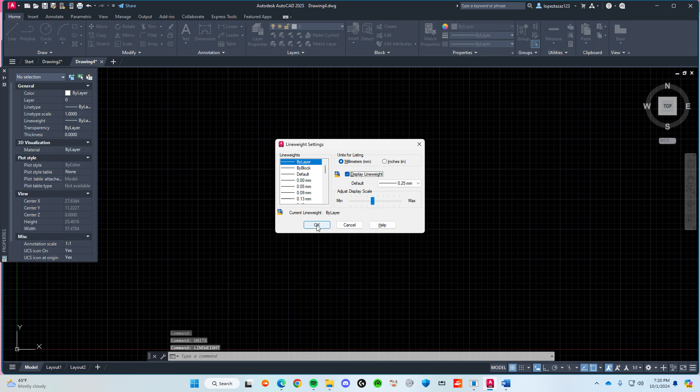So for mine, the width is 10.25, which is 10 and 8/32, and my height is 18 and 8/32. So 18.25 is my height. And once I'm done with that one, we can make the holes for our white panel.

Forgot to do this, but you have to make sure that it is on diameter. So I just forgot how to change that. So it should be on diameter when you're doing this. I don't want to end the video there.

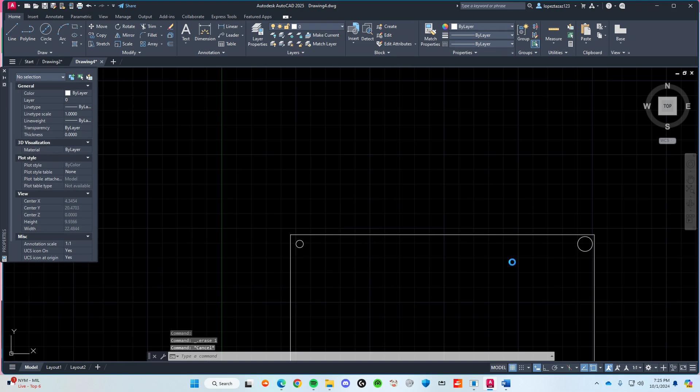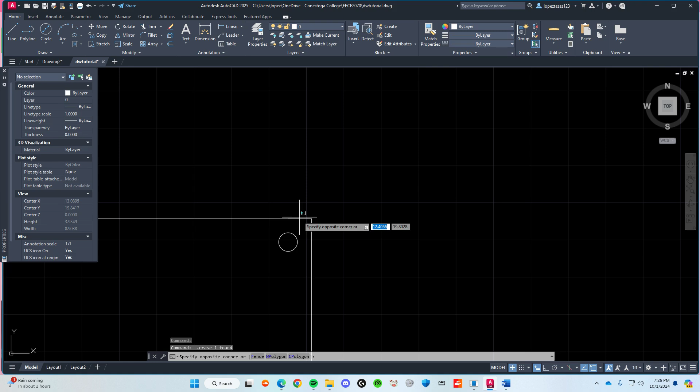Just make it, so yeah, make sure your circles are set to diameter. I have to redo this, so don't forget to save very often.

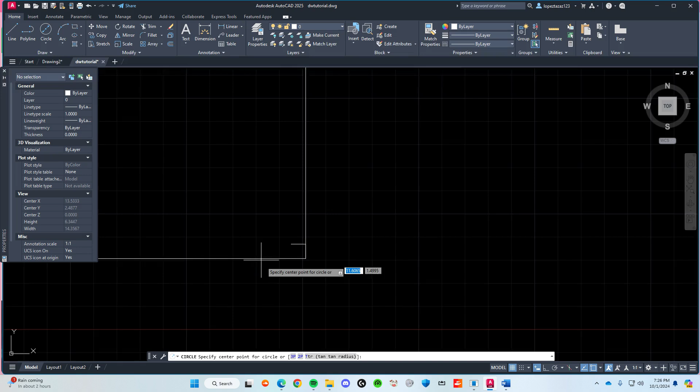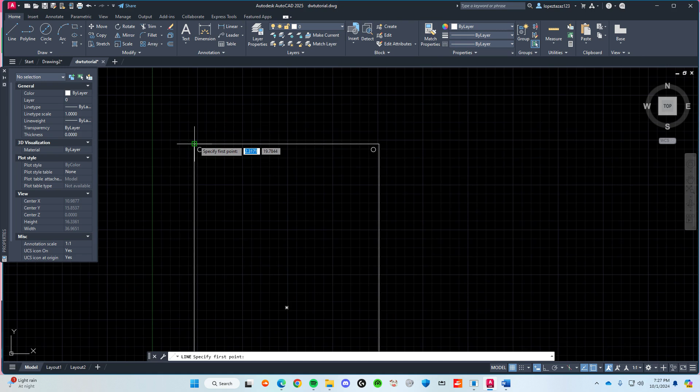Alright, once we're done with the holes there, we focus on the other holes. The 6 holes here in our white panel. So from here I went from 4 inches.

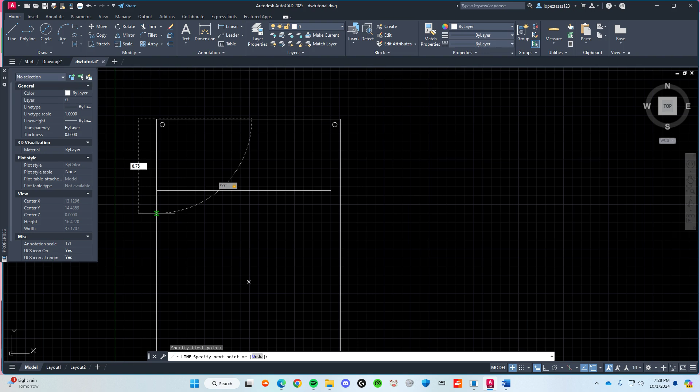0.125. So that's 8 24/32. I have to, 24/32. 0.75, so 8.75.

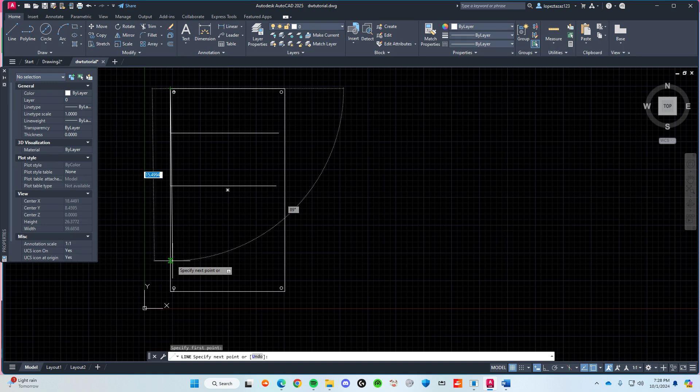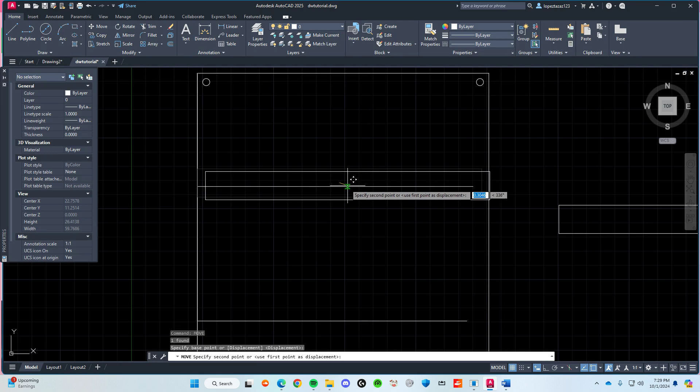So for my sketch I didn't really finish all the measuring part, so I kind of missed some of them. So what I'm gonna do is just make the bars. So mine was 10 and 1. Why is it not? Okay.

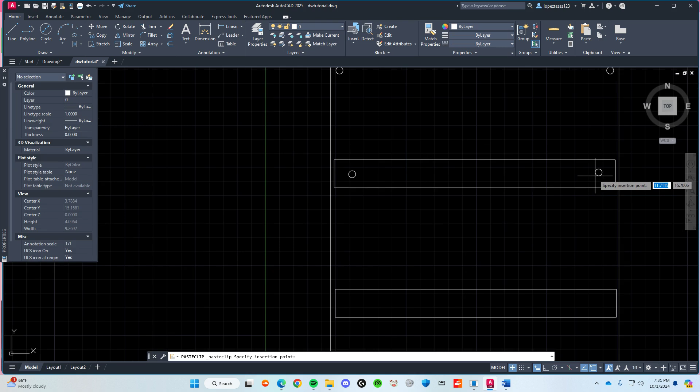Okay. Making sure it's diameter, 0.25. That's my hole. Okay.

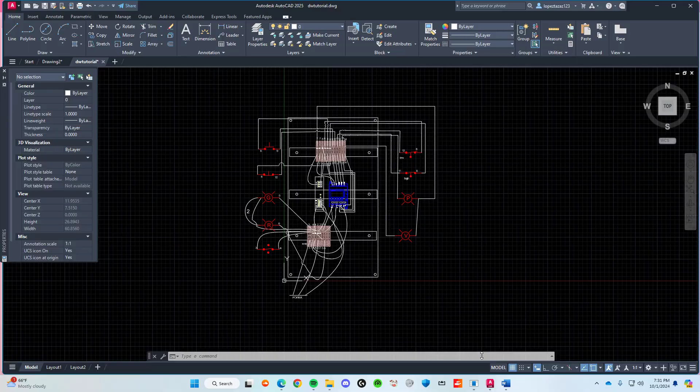Okay, once we're done with that, what's our next step? The components. So we'll be placing components now. So first thing, we gotta open. Oh yeah, we would want to open the DXF files.

So we need the terminal block. We'll be opening that. Change the file type to DXF. If it's not DXF, the terminal block is different. Okay, so terminal block, open a new drawing and type import. Import terminal block STP.

Just wanna wait for this. So yeah, it takes a while, but okay, so done. Here's our terminal block and Control C. So I'm pretty sure I have one.

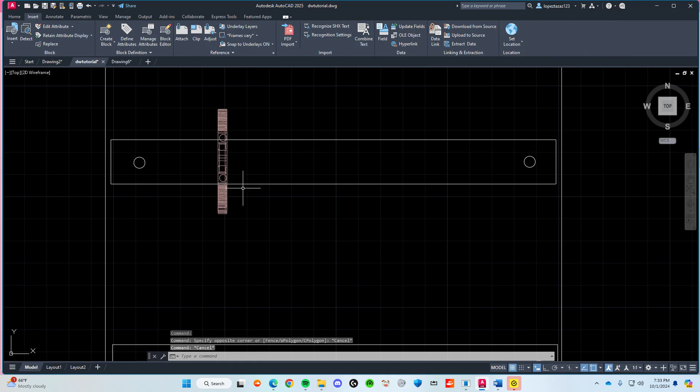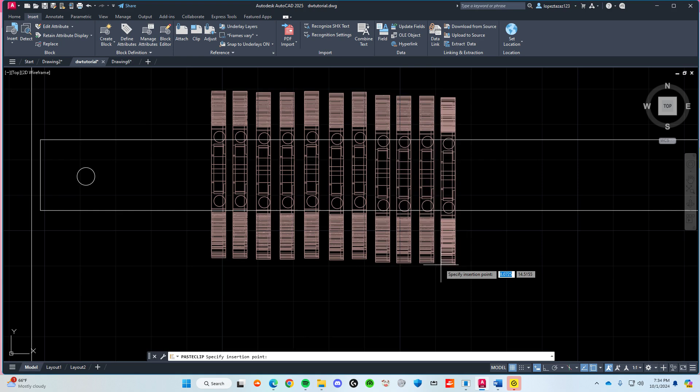One, two. I like to make a space for all of them. So 3, 4, 5, 6, 7, 8, 9, 10, 11, and 12, leaving us with 8 terminal blocks on the bottom.

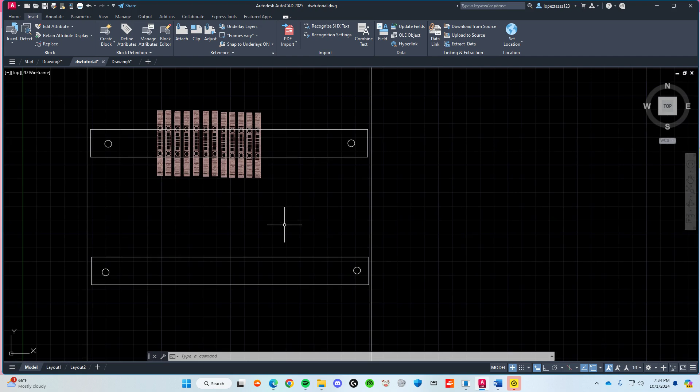So yeah, so that's the STP file. Now we'll grab the other, the fuse. We'll grab the fuse.

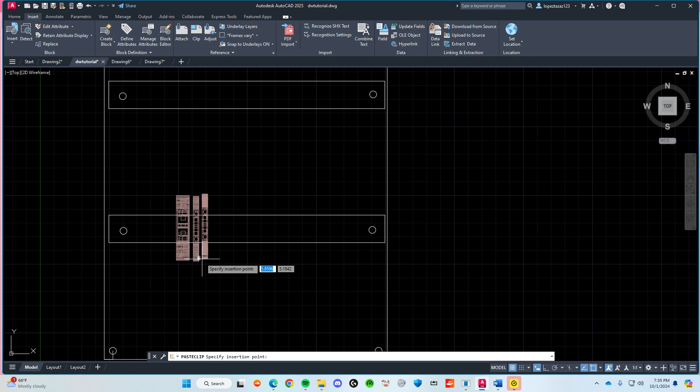So here you go. Fuse is there. Place it on the third one. One, 2, 3, 4, 5, 6, 7, 8. Yep, 8. 8 on the bottom.

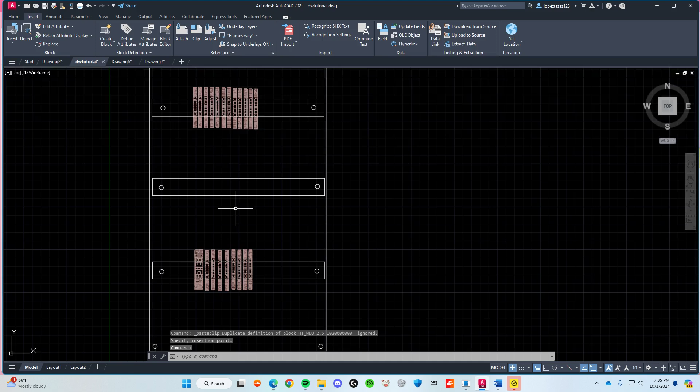Now once you're done with that, we need to select similar. Let's create a new layer first. So this would be our components. Pretty sure, yep, it's the components. And we would want to make that color into blue. There you go.

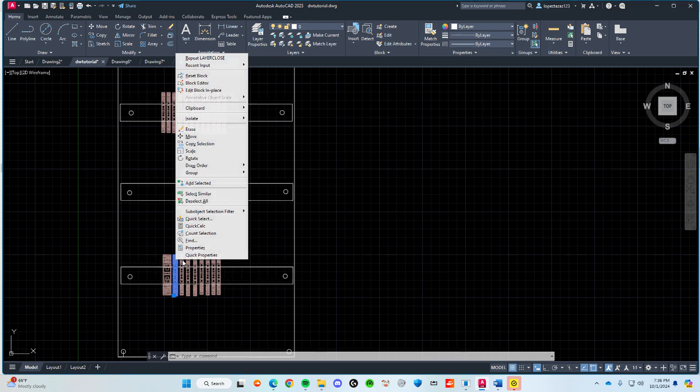Select that. Select Control 1 to bring up the properties. Go to components. Now it's blue. All of them are blue now. Now we make this fuse also blue, because that's our component. And the remaining one is the power supply and the relay.

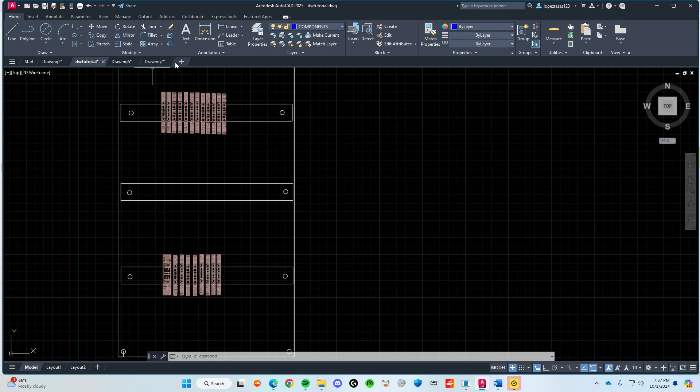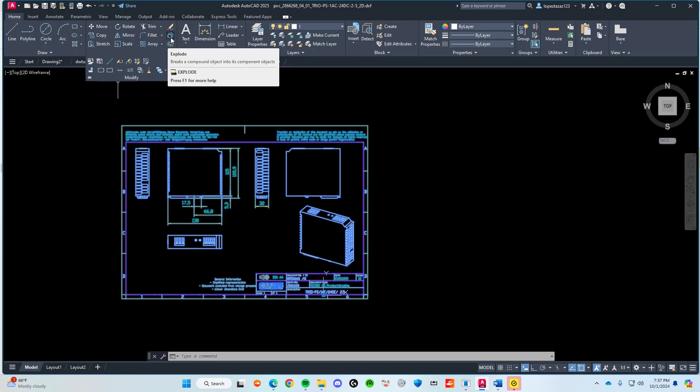Power supply, so DXF file, the front. And as you can see, this is the file, and we would want to break this apart. So yeah, click explode, and we'll just grab this. You'd want to scale it down a bit. Rotate it.

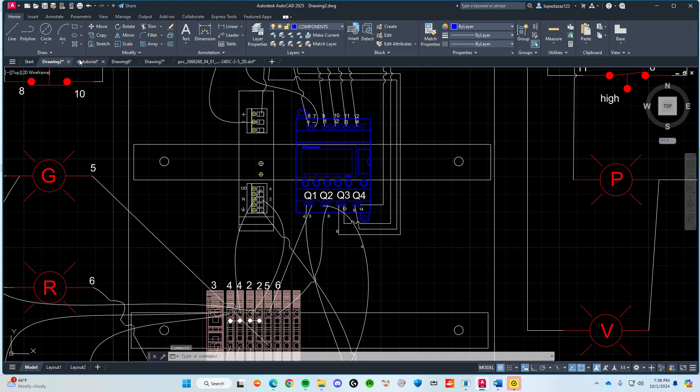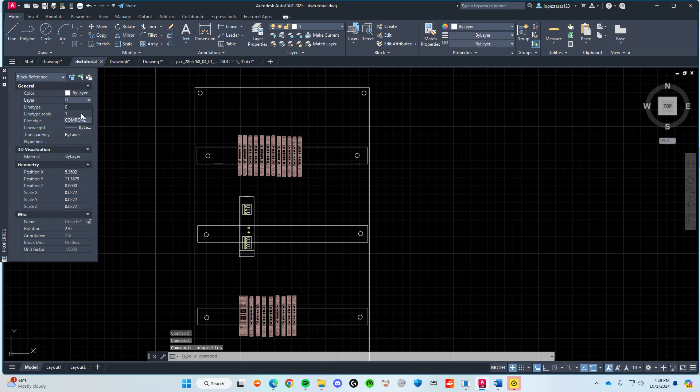Yep, rotate it. Let's see. Yep, that's right. Might want to scale it a bit. Done with that. Make sure it's on component. And last is our relay. Open that.

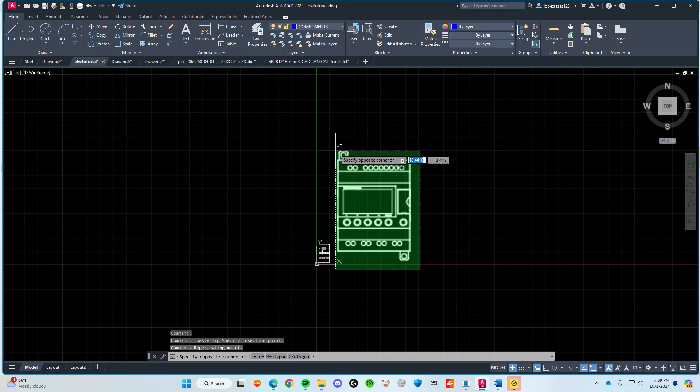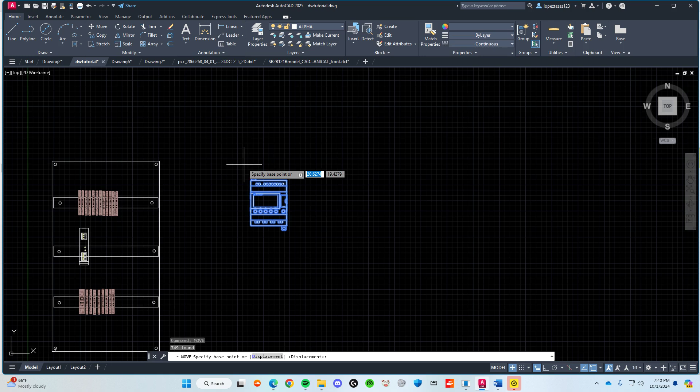So yeah, this is the relay, and we will want to turn off the dimension. Just copy this first. And scale it down. Let's just see. I say that's pretty big. Scale it a bit down.

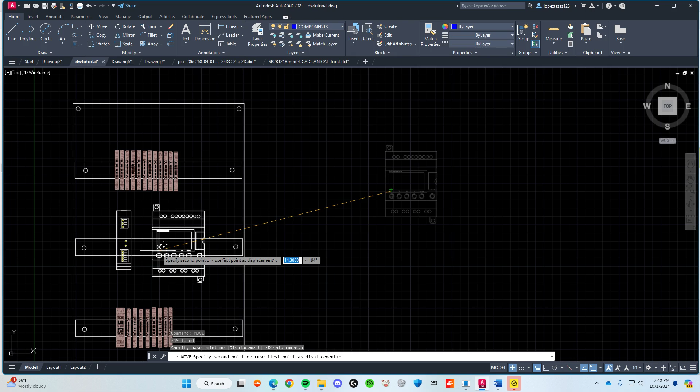Yeah, before that we need to make this as a block, and this is the relay. Now it's good to go. And it's on components, so we're good.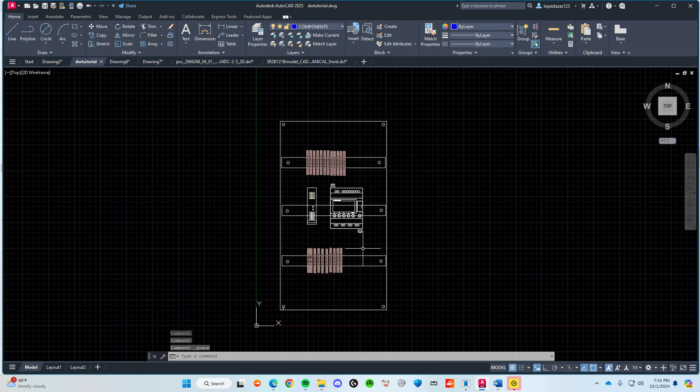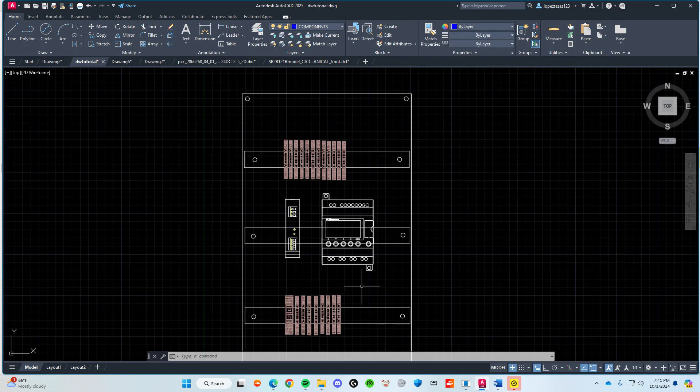So once that's done, we can move on to our dimensions. So let's turn this off real quick.

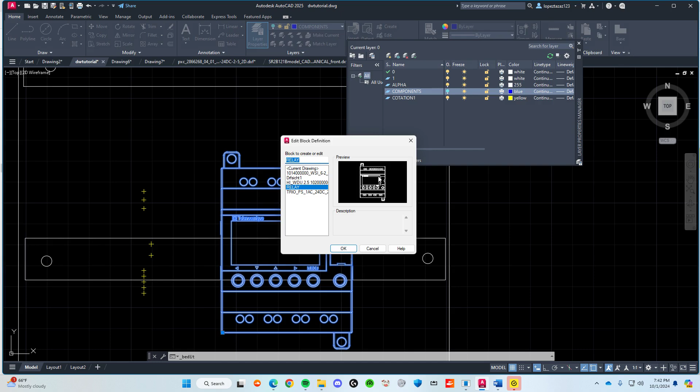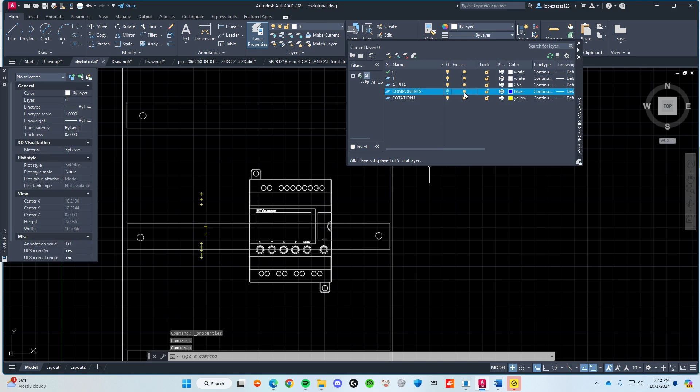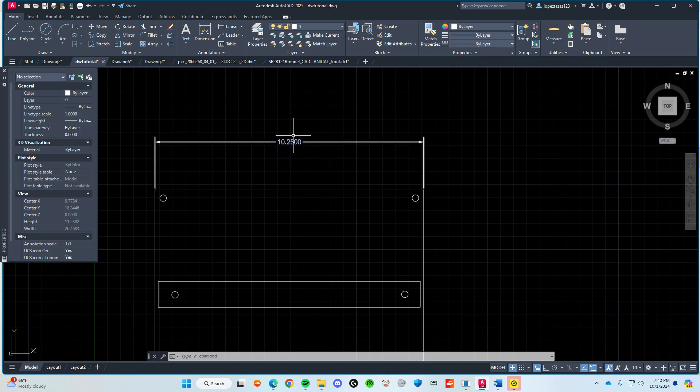So I'm not sure what's going on with this. It is the components, so yeah, just freeze them. That's all we want to do. Freeze, and we'll do the dimensioning for this one. So we know the width is 10.25. Let's just reduce this to 10.25 instead of 10.2500.

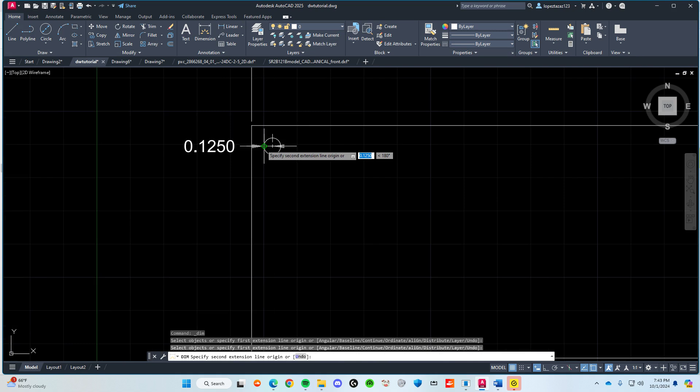And this one is up to your choice. You can do whatever for the text height. Just want to make sure that it's readable. So I went from here. It's 10.2. 0.125.

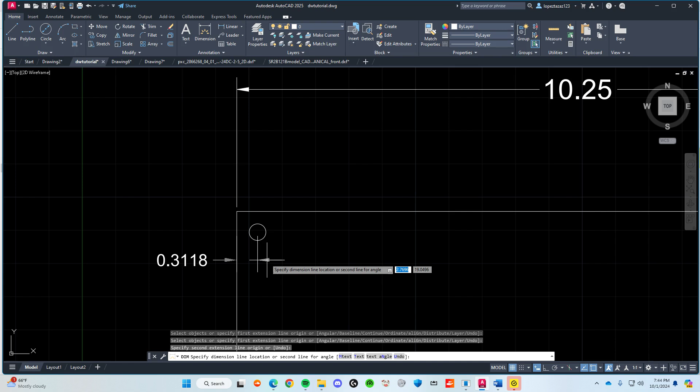Nope. From here to here. I said 0.3125 was my thing. So I did that. The new layer is our dimensions plus the wiring and other components.

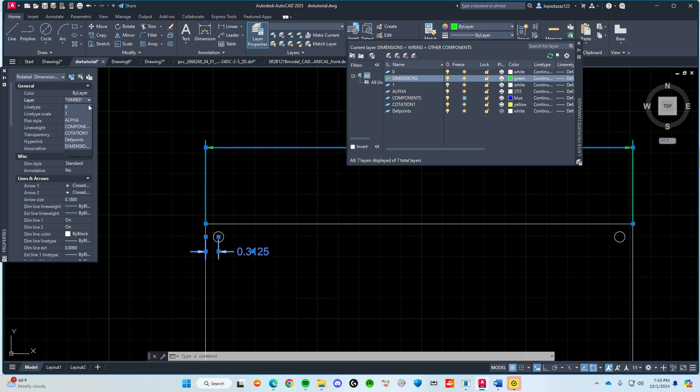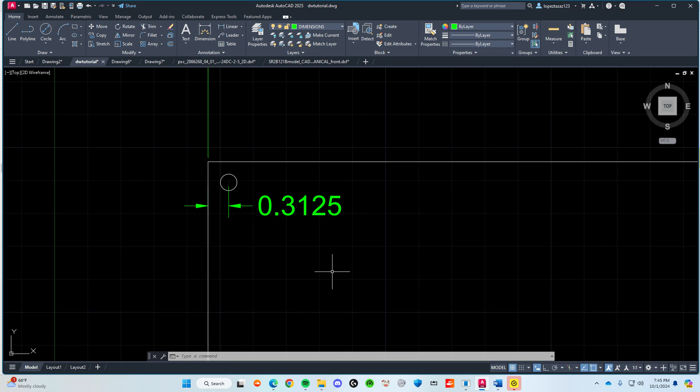Oh wait, no, my bad. So it's just the dimensions. We make this green. My bad, guys. So I got the dimension and the components, so now we're left with the wiring stuff. So yeah, we all have different sketches for our dimensions, but I'm just doing the one from my sketch.

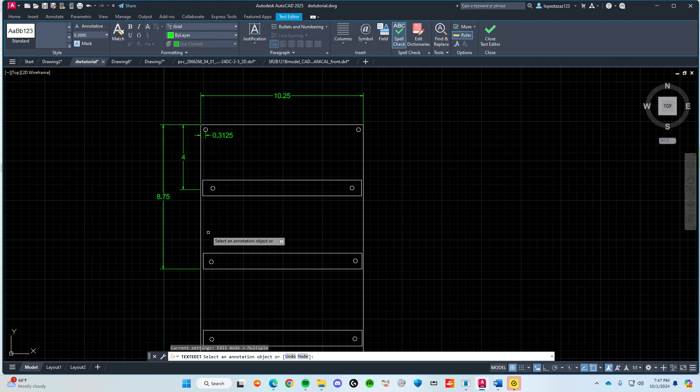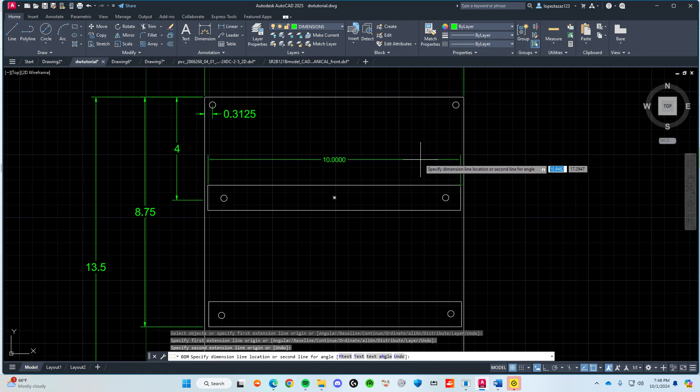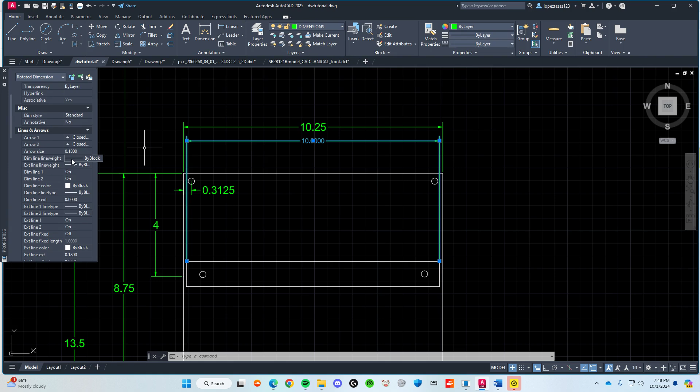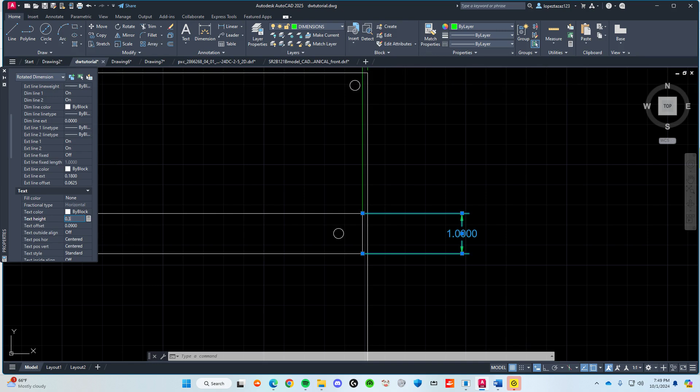So I'm on my last one, and this one is 13.5. So yeah. So yeah.

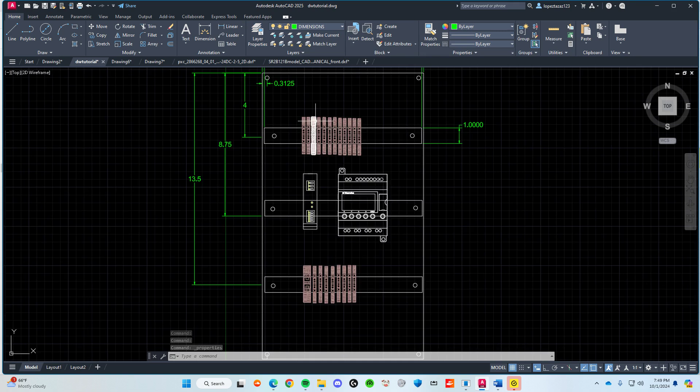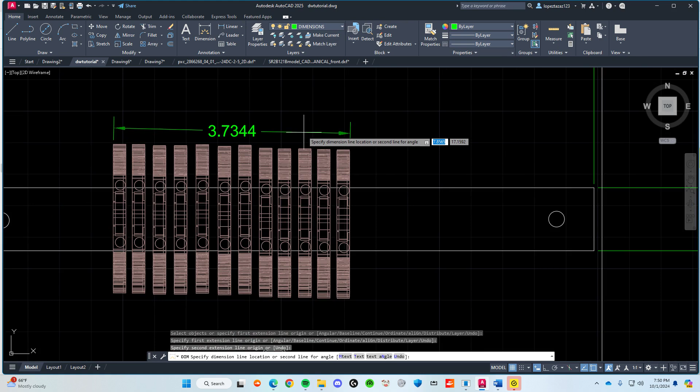We might want to unfreeze the components here, so we can do the dimensions for our terminal blocks. So from here to here. Mine was 2, and each one of these is

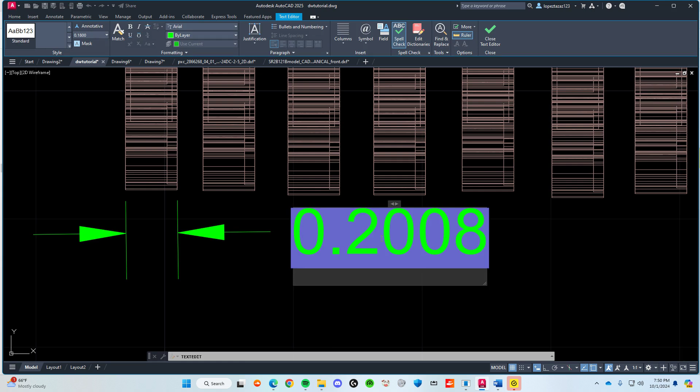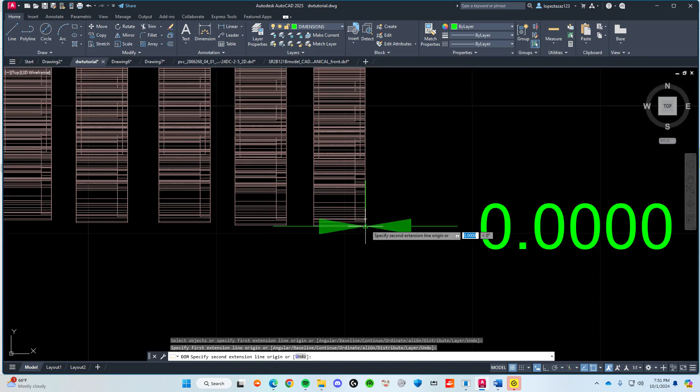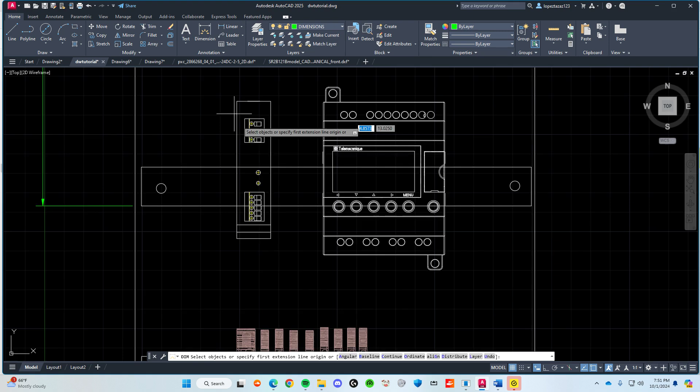8/32. Then the inch was 1. At least that's what I got for my sketch. I move on with this one. The power supply, the width is 1. Width was 1.25.

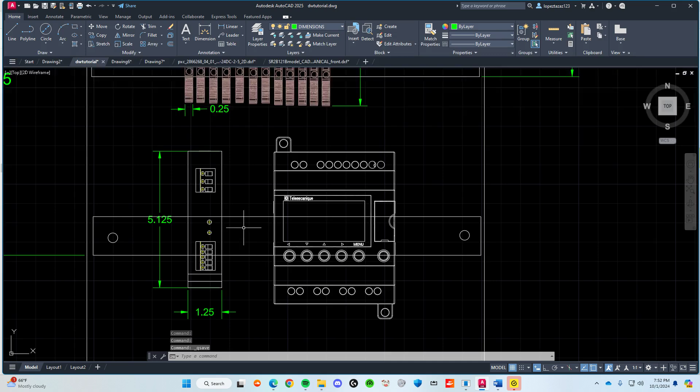And I got 5 and 4/32. So I got 5 inches and 1/8 for mine. Yep, now we move on to our relay.

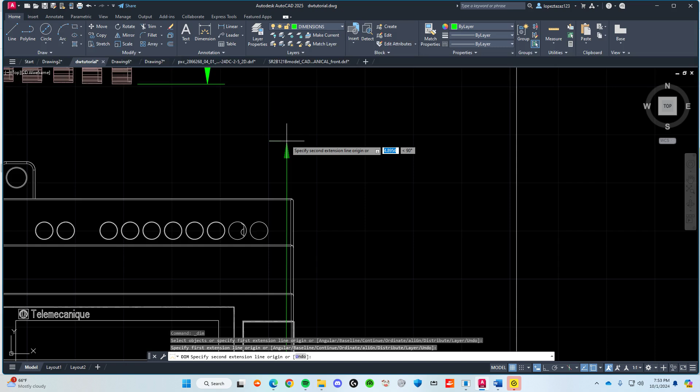So the height for mine was 3 inches and 16/32. Yep.

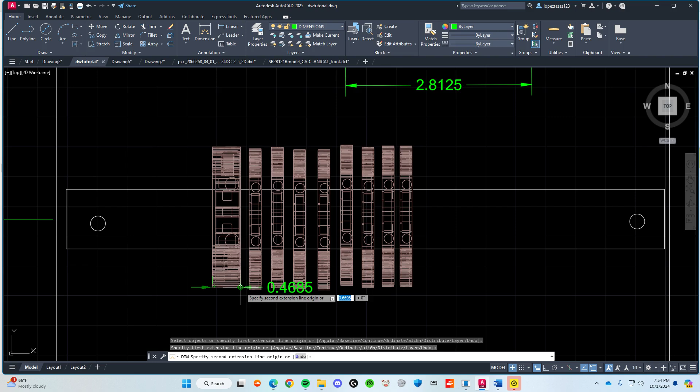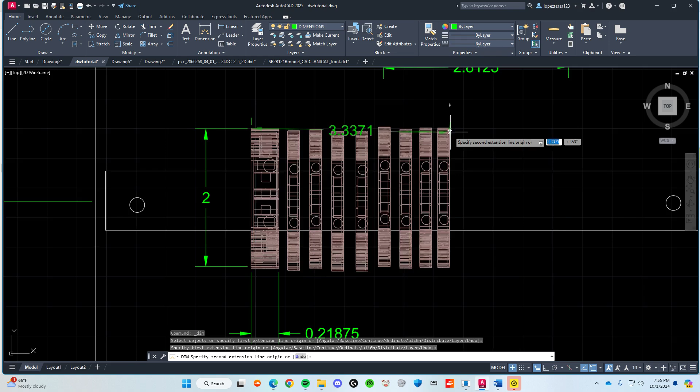So we want the width and the height for our fuse. What I got for mine was 7/32. And 2 inch. This one is 2 inch. Yep. Inch. Now the whole thing for mine was 2.5.

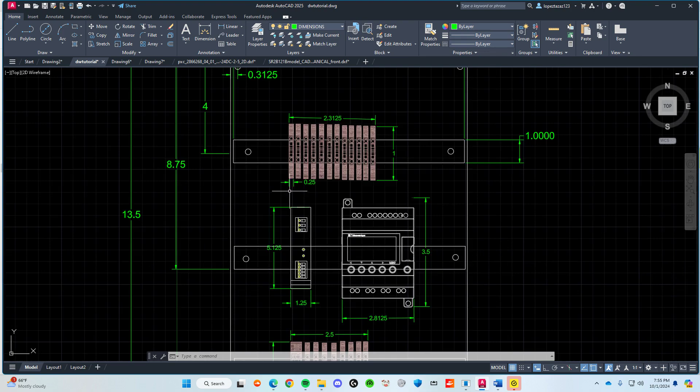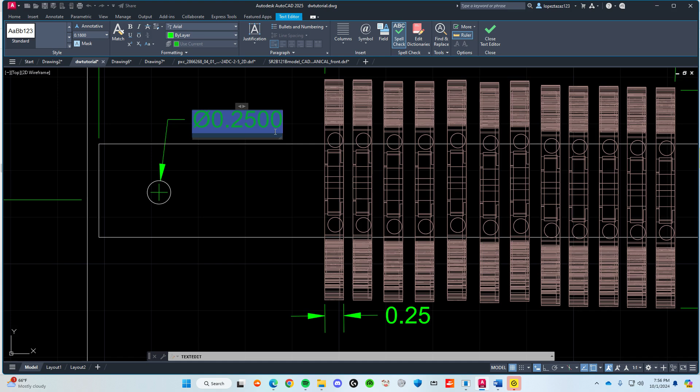Okay, once we're done with this, we have to make the dimension for our hole. So DIMDIA is the command. So yeah, we make that. There's 10 holes, so yeah.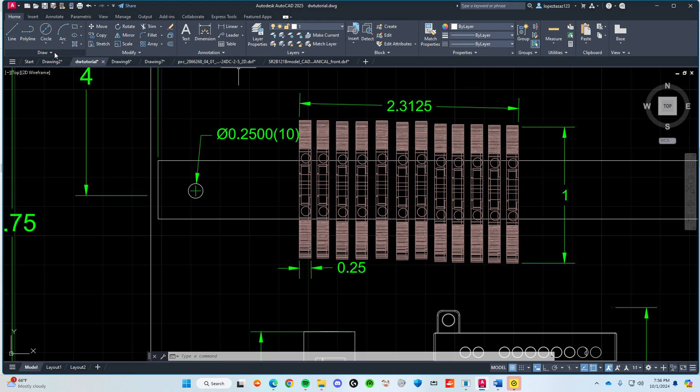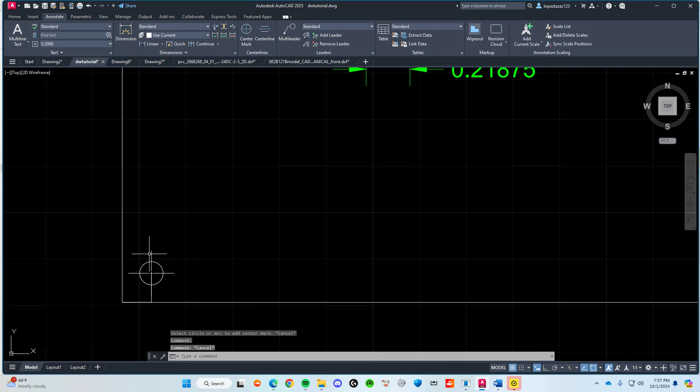And I forgot to mention, we have to make sure we have center marks for each hole we do. So let's do that. I'ma just speed run this.

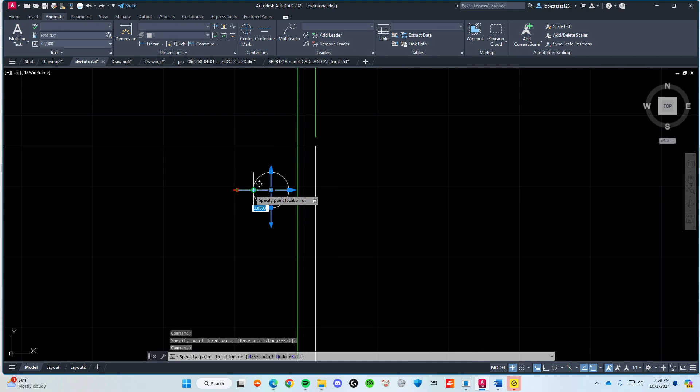So yeah, after we're done with that, we finish the dimensions. Now we're left with the wiring, wire numbers, and other components. So this part.